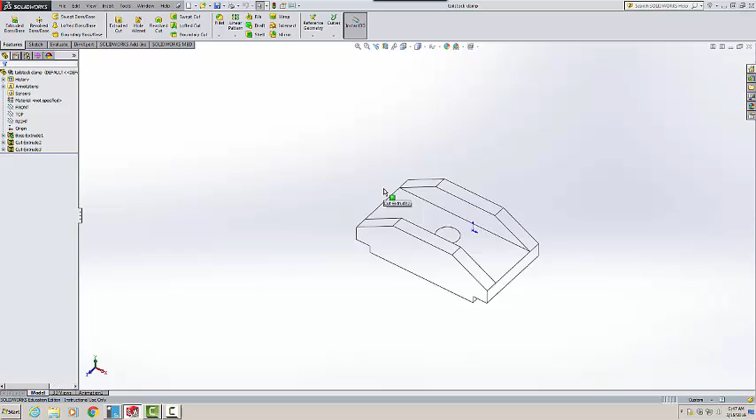All right, let's start off by setting up a paper. In SOLIDWORKS, we're going to have a separate file for the title block. It doesn't work the same way as AutoCAD. So we're going to go to File, New, and set up the B-size template in inches, because this is an inch drawing, and hit OK.

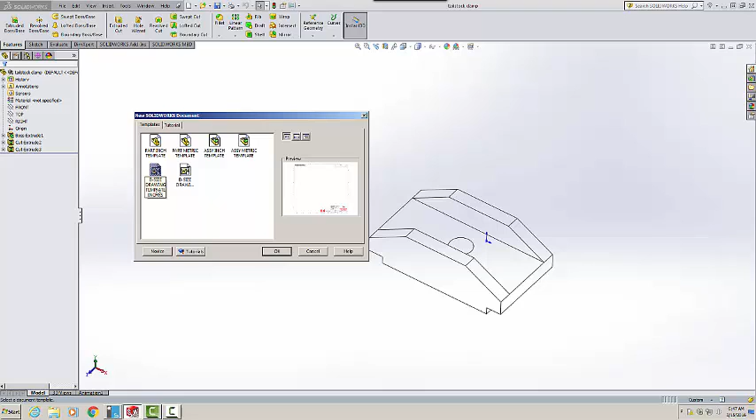So there's actually two files open. You've got the part file open, and then you've got the title block file open. As you can see here on the side, we have our tailstock clamp, and we're going to double click on that. When you do, you should see an orientation box that comes up. This is going to allow us to bring our views into the sheet.

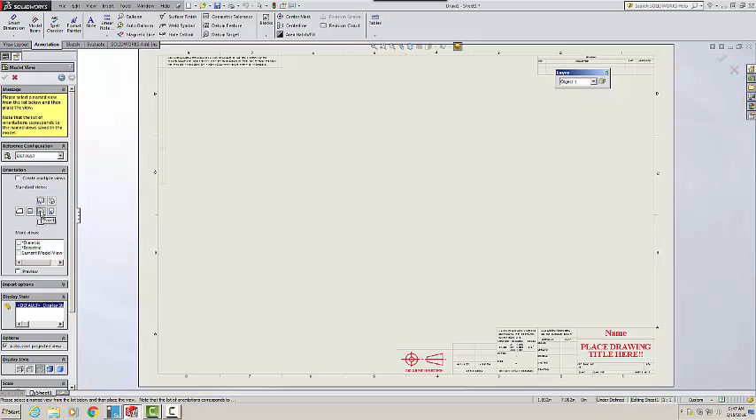So we're going to do just that. We're going to go to the front view, click on it, and drag it in, placing it where you think the front view should go. Then you're going to go ahead and place your top view by just sliding your mouse up. Notice that they stay aligned, and place in the top view.

And then we'll come over here and place the side view. Now once you've placed the views, we'll do the isometric while we're there. Pull that up at the corner, and then hit escape a couple times.

Once you've got them placed, you can simply slide them. You can see the little box on the outside. If you place the box out, you see that little red area there? So you can just kind of slide these things around, and you can see how the views stay oriented, and you can't really misalign the views. So I'm going to slide this over, give myself plenty of room, and they look pretty good.

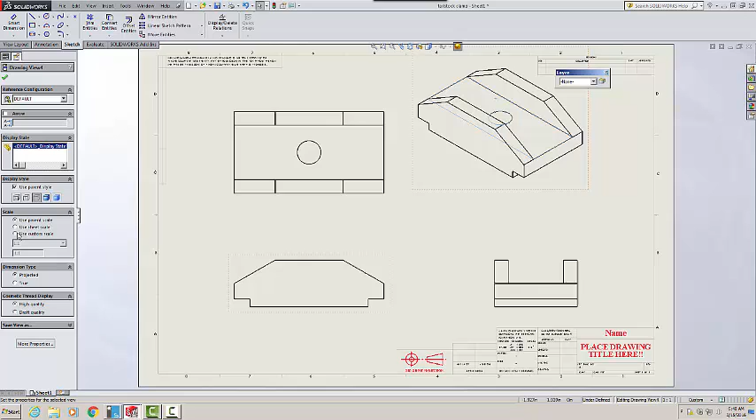On the 3D view, we're going to pick inside there and set the scale on that a little smaller. It's a little bit big, so we're going to use a custom scale of 1 to 2. That'll make that thing smaller and fit in. The thing we'll do is set the shading on that little 3D view, so that looks a little bit better there. Perfect. All right, hit escape a couple times.

Now we want to show the hidden lines on the part, and it doesn't do that by default. So if you pick on the primary view, which in this case was the front, you'll notice we have display style, and we have 5 of them. We're going to choose the second one from the left, hidden lines visible. And you can see when you do the primary view that the other 2 views come along for the ride.

So looking pretty good. The hidden lines are all solved. We don't have any center lines, but the hidden lines are perfect and the solid lines are perfect.

All right, let's talk about those hidden lines, and let's talk about the center lines. You can see our layer here—if that layer is not open, you can just right click on the top and hit the layer button, and it may come up there, or it might come in down here on the bottom. It may come in there your first time, so let's just drag this up here so we can see it. Okay, you can see the layers that come with SOLIDWORKS out of the box.

We have dimensions, notes, section lines, object 1 and 2, title block, and tables. I want center lines, so I don't see one there, so we're going to make a new layer. Just like in AutoCAD, we're going to make a new one. New, and we're going to call it center.

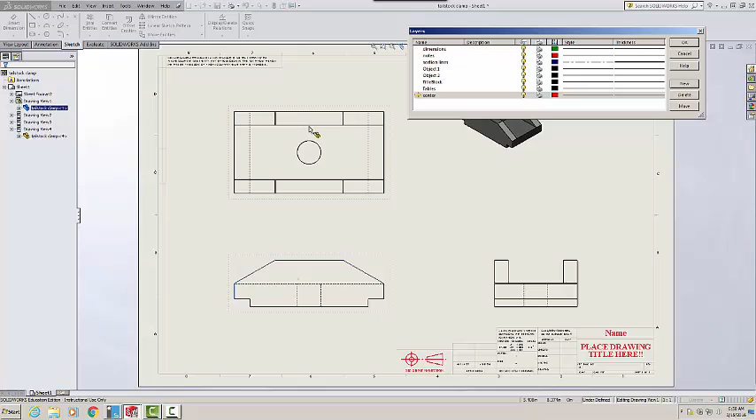Let's set a color. We'll make that red and hit OK. You don't need to put a line style on that—it's going to be automatic based on the way SOLIDWORKS puts them in. All right, hit OK. So if you look here, we should be on the center line layer.

Whoops, that's not what I want to do. Let's change that back to object 1. Let's do this first. Let's take this primary view before we start doing hidden or center lines, and let's change it to object 1. What that's going to do is put all of the primary lines in the object layer. All right, and then click off of it.

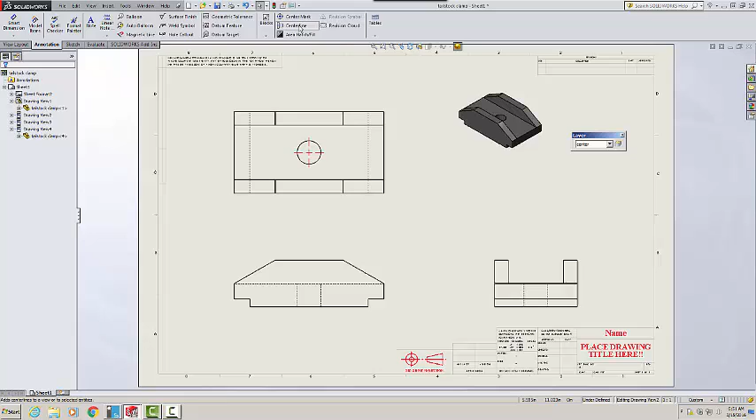Now we'll go to center line. All right, here we go. So we're going to go to annotation and center mark. This is exactly like AutoCAD—you just pick the circle, the center line's there, hit the green check, and you're done. Real easy. We're also going to do center lines, which don't come in automatically. You can pick the edge and the edge, and it puts it down the middle. Same thing here, pick the edge, and it puts it down the middle. And green check it.

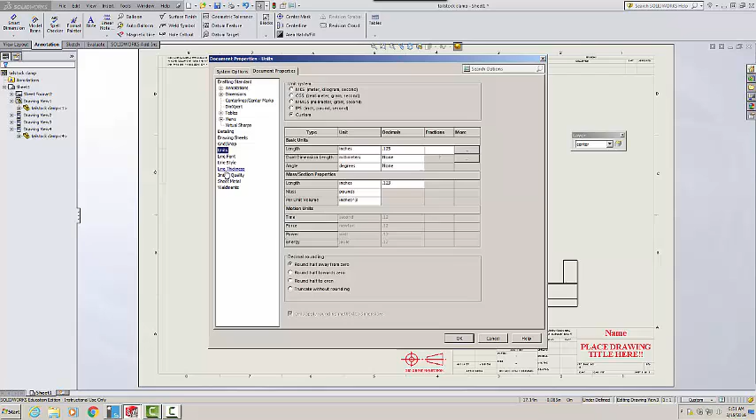Okay, what is next? Let's go ahead and set up our line weights. SolidWorks is not going to do the line weights by default, so we have to set them up. So we're going to go into this place where it says custom here down at the bottom right corner, and we're going to edit document units. There's a couple things I'd like to do here. I'd like to change the line weights, so we're going to go to line thickness and change the normal line to what we want our object lines to be, which is 0.020. That should be good—I don't really have any thick lines on this one, so that's really the only one we have to change.

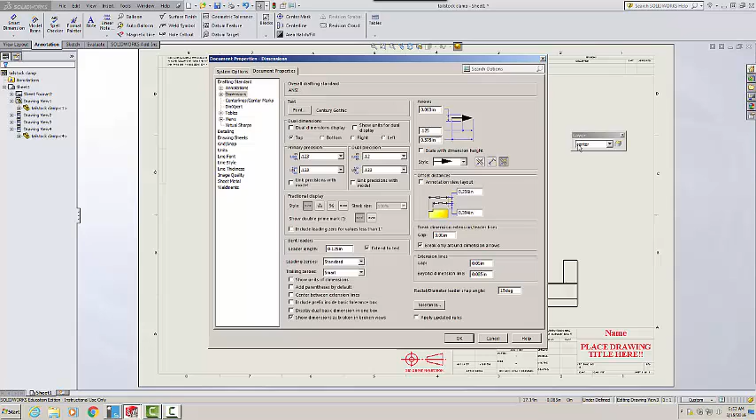All right, and we're going to go to dimensions. The arrowheads out of the box are a little bit too big—like the AutoCAD ones when we first start—so we're going to make the length of those things 0.125, just like we do with AutoCAD. I think the text size is actually just fine, so we're going to hit OK on that. And we're looking pretty good there. I think we're all set up to go.

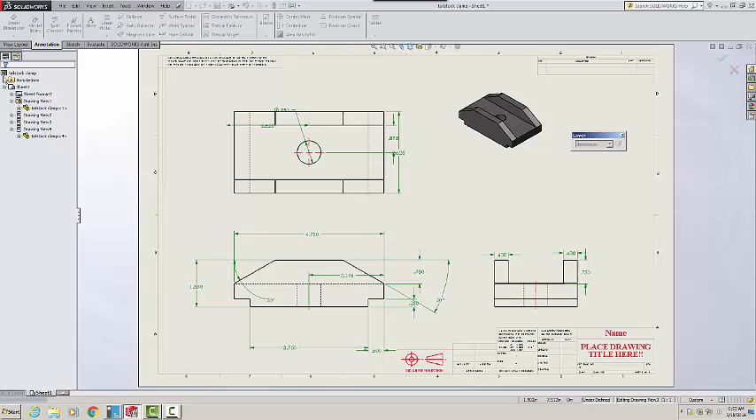So let's go ahead and get some dimensions on this thing. We're going to go to Insert—let's put this on the dimension layer first—Dimensions. We're going to go to Insert, Model Items. We're going to do entire model, not selected features the default, but we want entire model. And we're going to use dimension placement in sketch. Hit the green check and watch this. Oh, this is really cool—so all the dimensions exactly where you put them are there.

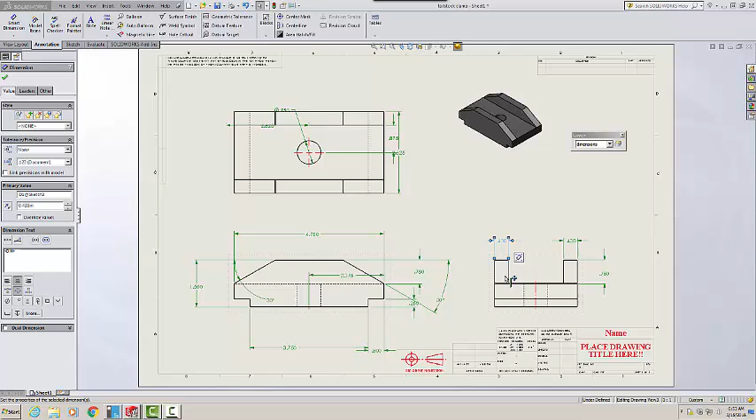So this is where you get a chance to move them around. You guys know how to dimension, so let's see. Let's take that one, move it out a little bit. You can see that the extension lines sometimes need to be pushed around a little bit, like so. Move that up a little bit. Dimension to the contour of the part. If things look kind of squishy in there, you can always move dimensions out like so. I think that's what we did on the other one as well, and bring it out like so.

So that looks pretty good there. Let's see—that's 750. I think I want that over here. So the way you move a dimension—don't ever delete a dimension, by the way, don't delete dimensions. If you pick the dimension, hold the Shift key down, then grab it, left click, hold, and drag it and let go. It'll move it to the other view. So don't delete them, but you can certainly move them to another view.

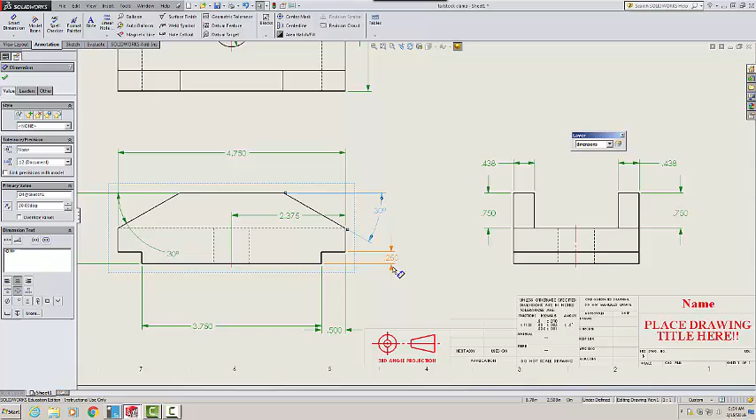And you can see the grips over here. I'm just going to bring those back to where they need to be. Come on, like that, and like that. And that looks significantly better than it did on the other view. And now we have enough room here to get that 30 in without squishing it. That 250 I'm not really digging—I think I'm going to move that 250 off to the side like that.

That 3.750, that looks pretty good there. I'm going to make the 5 line up—they kind of snap in really nicely with each other, which is pretty cool. This 2.375 is also a problem—we want the dimension to the hole itself. So I'm going to do the same thing I did with the 0.750: I'm going to click on the dimension, hold the Shift key down, drag it up, and put it on this view.

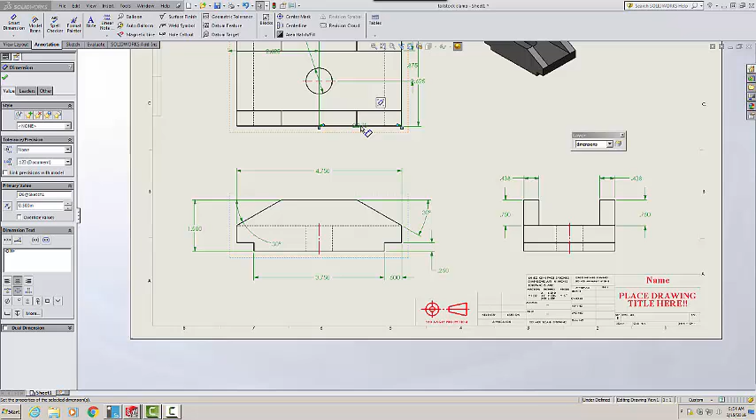And that's much better. We move these apart. That looks pretty good there.

This 0.875 looks pretty good, but I don't like those arrows in there. So if you just click on the inside, see how it kind of snaps? See how it snaps, just clicking. There you go. That 2.625, I have no idea where that thing came from.

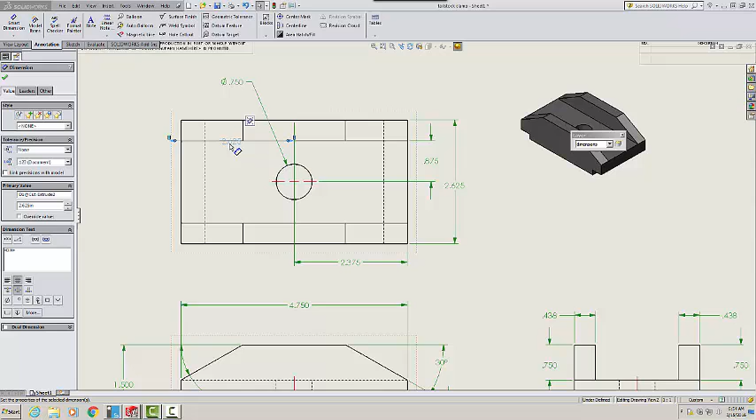Don't ever delete a dimension. I'm not sure where it came from, but what I want you to do is right click and hide. Don't ever delete a dimension. You can hide them if you don't need them, but don't delete them because that was used in the modeling.

That 1.500 should be on the other side here because it's an overall size we want in between the views. That looks pretty good.

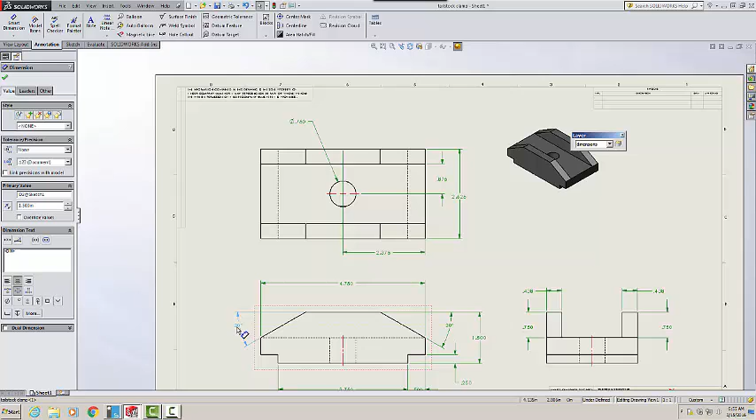As we look around here, that 30 doesn't look very good there. I'm going to bring that out here. It's okay to cross extension lines, so that one's all right. Okay, so that actually feels pretty good.

I think there's no missing dimensions and they're not squished. They're easy to read. Oh, I see 2 750s there. See that? There's 1, there's 2. I think I like that one better.

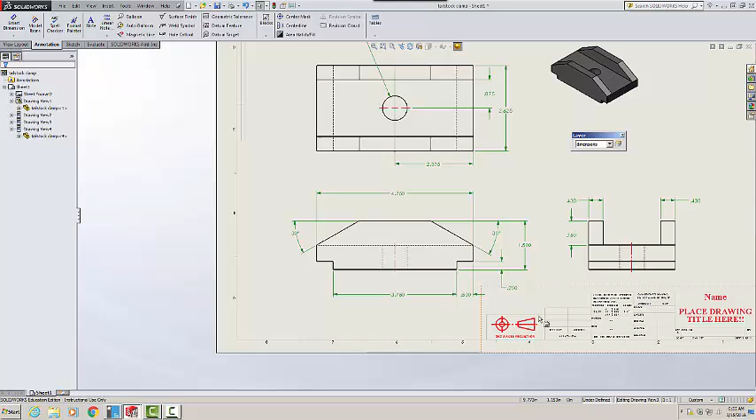So we're going to take that one and right click and hide. I think we did it because we did the cut over here with a 750 and we did the angle over here with a 750, but we don't need both of them. So right click hide. Like I said, don't ever delete dimensions.

Okay, your last play is the title block. Title blocks are kind of funky. Again, there's different files. You've sort of seen the part itself kind of linked into the title block. So you're going to right click on the title block and edit sheet format.

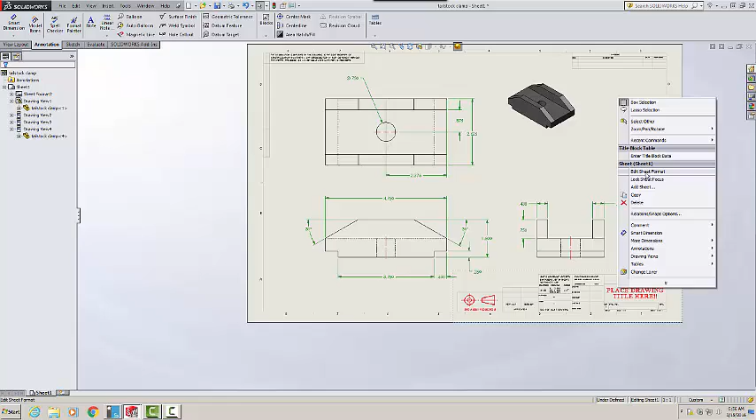And this is where you can come in here and you can put your name in. Call M Brown. You might have to abbreviate because they're pretty big right there. So if you have to do your first initial and last name, that's fine.

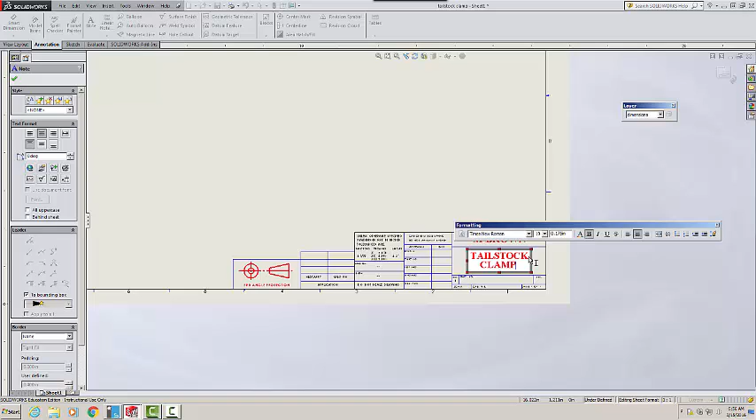And then double click here and then give the name of the drawing. This thing's called the tailstock clamp. I'm going to actually hit enter here because otherwise this is going to go off the sheet. And we'll have to find a way to get this text a little bit smaller. Okay, that looks pretty good.

We do need to put the drawing number on here, and this is the way you're going to do it. You're going to be in annotation. You're going to go to note, and let's put this on the notes layer.

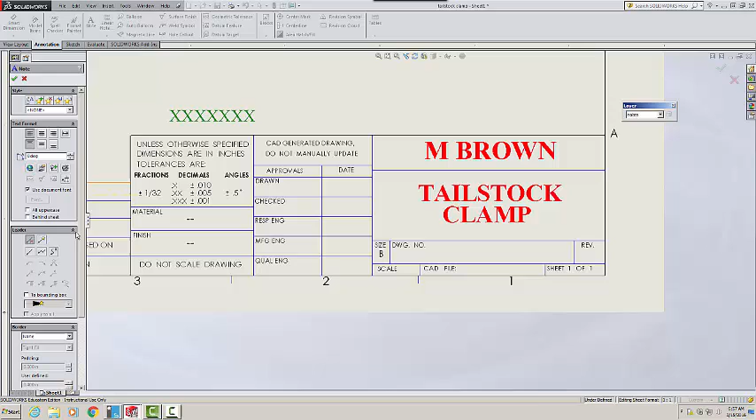Okay, and then you can see we have leaders on there. See how there's a leader, but if you go over here to leader there's a no leader one right there, see on the top left corner, and then we can drop that in. And I think this is SW3, whichever one it is. Plop it in like that.

So we are in pretty good. I like the title block. It's all good. The notes are down here.

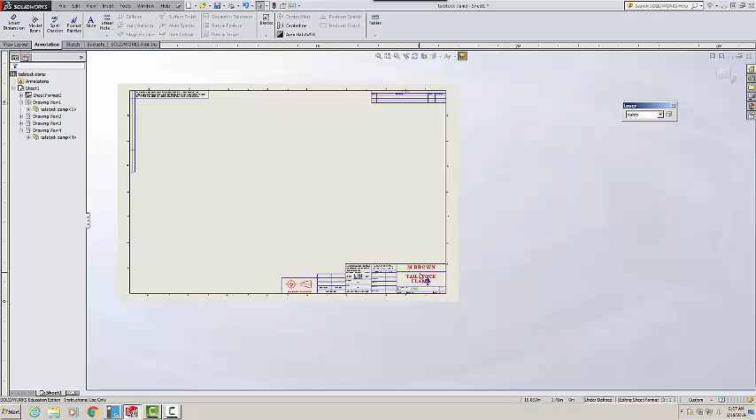So once we're done, we're going to right click. I'm still in that command. I'm going to right click and we're going to, come on now, right click and edit, sorry, right click, edit title block.

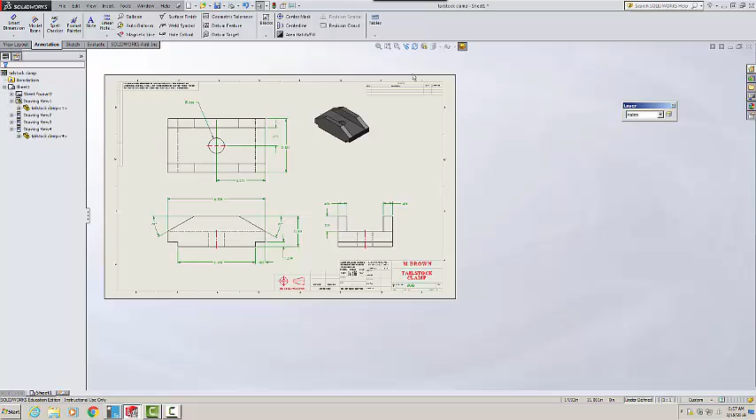So we're going to go back to edit sheet now. And now we're back in the sheet. So I was not getting a right click on there. So the sheet is now there. Let's edit sheet to get back into it. Right click edit sheet. All right, the drawing is good.

We're going to save it. File, save as. I'd like you to save it not just as the name of the part, like tailstock clamp, but just give me like a WTB or something like that. I'll put it 2 here because I think I already did this demo. And hit save. So you actually have the part and then the part with the title block.

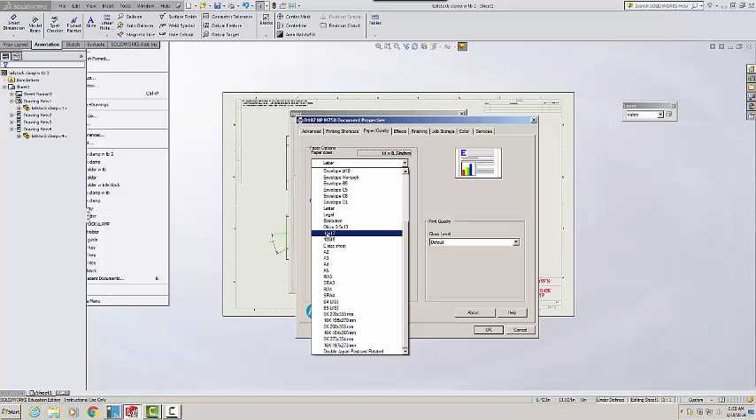And that's it. Let's go ahead and print this thing. So file, print. You're going to be on the M750. Let's go to properties. Let's set the paper size to 11 by 17. Effects, print on. I think that all should be good. Hit OK, and then hit OK, and you should be good.

So there goes your part. Okay, I think you're good to go.